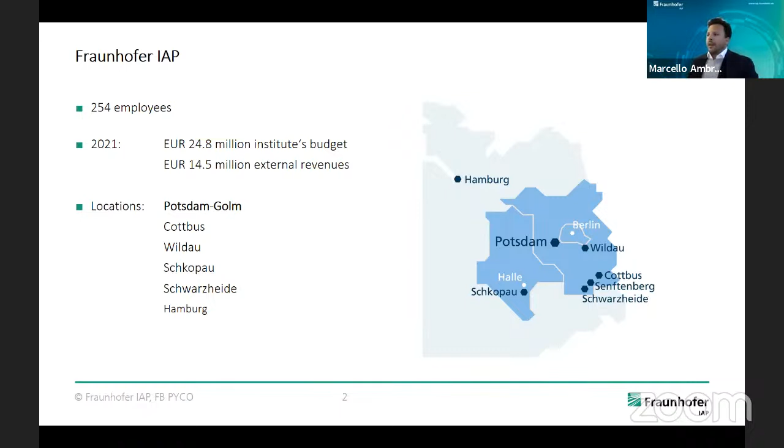So first of all, a few data about the Fraunhofer IAP. We are around 250 employees. We are located in the metropole region of Germany's capital, Berlin and Brandenburg. Our headquarters is at Potsdam. As PYCO, we are working on two sites, especially Cottbus and Wildau. I'm actually located in Wildau, which is not far from Berlin.

Here we can see our brand new buildings that we got last year, and we're pretty proud of it. So everyone is invited to visit us. As we're near the Polish border, we're also working a lot with Polish partners. There are also a lot of lightweight technologies located in this border region, so there's a lot of cooperation.

How are we set up and organized? The Fraunhofer PYCO is directed by Professor Seidlitz, and we divided our team into main divisions, departments. On one hand side, you find the tailored materials. On the other side, design and process technologies.

First of all, for the tailored materials, we have polymer development, covering high performance polymers, recycling and repair technology, microelectronics, and also alternative hardening and curing methods. Then we have Dr. Sebastian Steffen, who is responsible for our semi-finished components such as fabrics, bio-based materials, and modification of materials for fire retardancy - this is one of our main areas of expertise in this field.

On the other hand side, design and process technologies - we have my group, design and simulation, when it comes to the holistic design and conception of structural components with composites, but not only the parts, also the manufacturing processes like automated fiber placement and additive manufacturing. One of these processes I will explain today in this webinar.

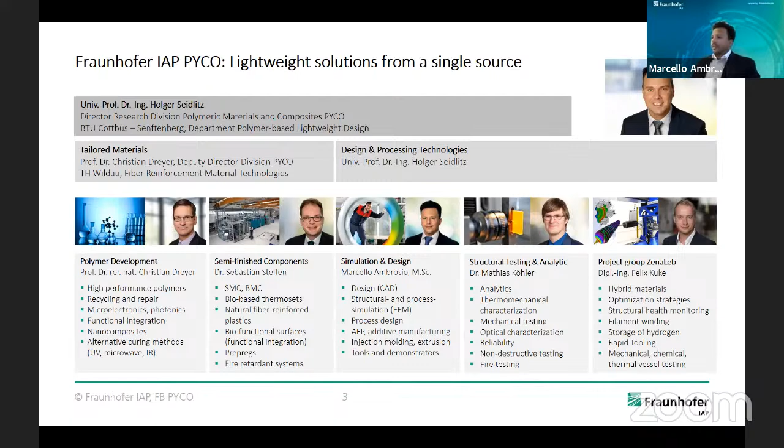Lightweight technology as a key for energy transition. As you know, we have big issues in our world: climate change, greenhouse effects, global warming. The requirement is to reduce CO2 emission, energy savings, and mass efficiency.

In this context, when we look at the formula for mechanical energy, we have mass, gravity, and velocity. Gravity we cannot change, it's basically a fixed value. Velocity we want to get slower. So the only thing we can do is reduce the mass, or work on the mass.

That's why the approach is to customize materials, design, and processes to achieve the goals and solve these problems. Lightweight is a cross-sectional discipline of lightweight design, and we make use of digitalization and AI, simulation of complex systems, to develop lightweight composites, digitalized product development, digital twins during development, with the help of decarbonization, national hydrogen strategies, as well as biologization of technology and circular economies.

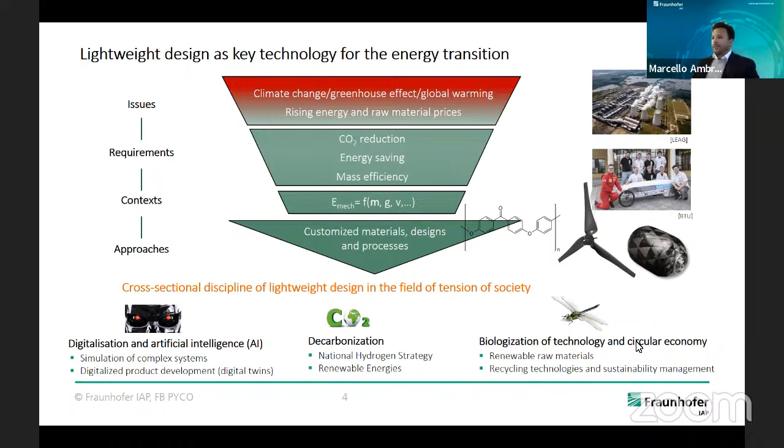We can see here different exports in the world, mainly when it comes to transportation and machinery. When we talk about the Western world, especially Germany or the US, we have a high amount of transportation and machinery. Lightweight technologies are very important to contribute to the climate change goals.

When we decrease the weight of components or technology by up to 10%, we are already able to save 3,000 million tons per year of carbon dioxide. Just to give you a brief impression of how important lightweight technologies are.

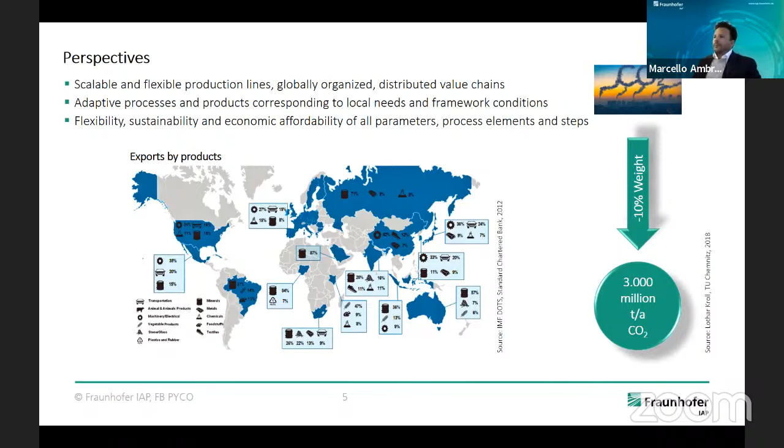So in this specific case, polymer-based composites - what are the advantages and challenges? We have excellent specific mechanical properties. We are a little bit stronger than steel, for example, but almost 4 times lighter. We have adjustable properties regarding thermal, acoustic, and mechanical behavior, a high degree of design and layout freedom, which also gives us the possibility to increase the degree of automation.

I want to explain why the orientation of fibers, let's say glass fiber or carbon fiber, is important. When we apply force in the fiber direction, we get almost 100% of the fiber performance. What is shown in this diagram on the right-hand corner is a strongly anisotropic behavior of these composite materials.

As we change the orientation of the material by only a few degrees, say 5 degrees, we already drop the performance from 140 gigapascal to 120. When we deflect about 10 degrees, we only reach half of the performance. That's why accurate positioning and orientation of the fibers while designing these composite materials is very crucial for performance.

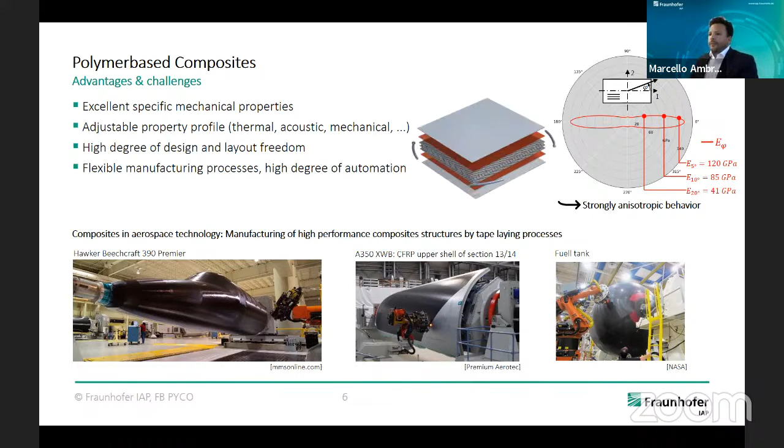For the future, we see the amount of composite material increasing drastically in aircraft manufacturing. We get 30% mass savings through the use of carbon fiber reinforced plastics. From the 70s to nowadays, with the modern A350 model, we have around 50% more carbon fiber or composite material inside the aircrafts.

To come to the hydrogen storage application, I would like to explain our developments regarding hydrogen storage, as an example of our recent developments for a decentralized Power-to-X pilot plant using solar and wind energy.

In this case, you can see a very simple and basic scheme of a Power-to-X plant. On one hand side we have a small wind turbine, on the other hand side we have hydrogen storage, and in between we have a control system, electrolyzer, and a fuel cell. I don't want to go deep into the other components - I would like to focus more on the wind turbine and the hydrogen storage for this session.

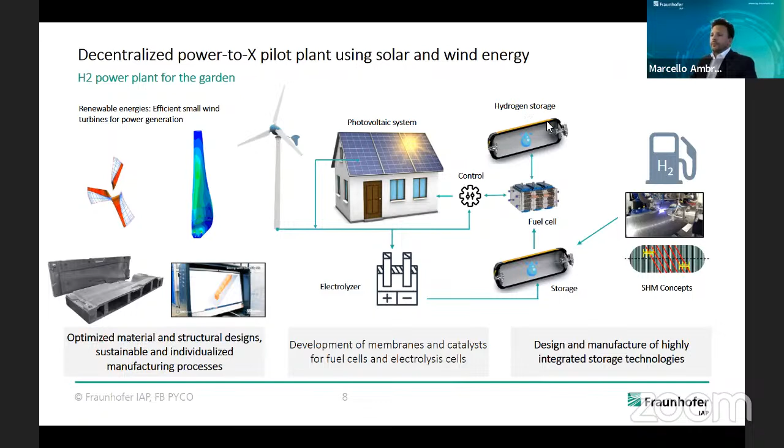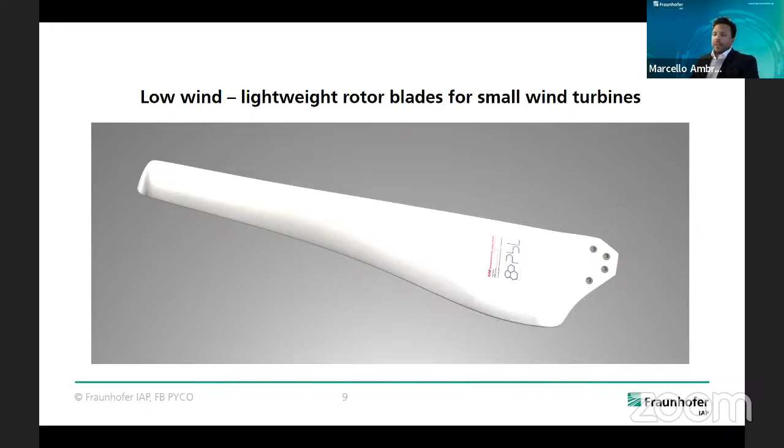So first of all, I would like to start with the low wind, lightweight rotor blade for small wind turbines. We developed that in cooperation with the University of Cottbus and a company, EAB Gebäudetechnik, here in Brandenburg. And what it is all about.

First of all, what is the potential for small wind turbines? I suppose every one of you knows the bigger ones, but actually there's also high potential for smaller ones. The actual problem is that recently designed small wind turbines are mostly made for shore regions or higher wind speeds. As you can see here on the maps for France, Germany, and Tunisia, we have high winds especially in the coast regions or mountain regions, but everything in between, we can see very low winds.

What we also have is that this low power revenue of wind speeds from 3 to 5 meters per second is not economical for someone who wants to install these kinds of small wind turbines. We also have high costs due to the manual manufacturing processes. Basically, these rotor blades are made of hand laminates, and there's low social acceptance, especially in urbanized zones and big cities. They don't want to have these small wind turbines everywhere.

So what is the actual demand? We need small wind turbines for low wind regions with decreased operating wind speeds, to place them in our middle region where we have low winds. We have to reduce the cost of manufacturing and the weight, and we have a high demand regarding the actual problems in the world for decentralized power supply due to increasing energy prices.

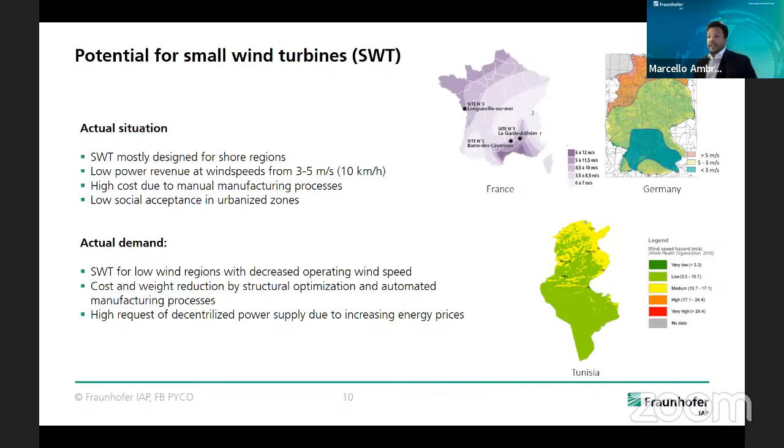So how did we solve this problem? We developed a glass carbon fiber shell design. We have a rotor blade system which is 1.5 meters long, so the diameter will be 3 meters. The tower of the wind turbine is around about 10 meters high.

And you have to know that when we come up to higher winds at a certain point, the machine has to stop, and therefore we will have some adjustment mechanism in the blades, which are very high in maintenance. With the optimization of different designs and profiles, we reached a weight reduction of 35%.

Our blade decreased weight from 3.7 kilograms to 2.4 kilograms, and at the same time we increased the effective surface about 45%. Due to our optimizations, we were also able to reduce the noise. And what is very special at this point, we manufactured these composite blades with a printed tool, which I will explain now.

So what is the performance? We have 2.5 kilowatts at 8 to 10 meters per second, and a minimum wind speed of 3 meters per second. As you can see, we already match these low wind regions for the installation of this rotor blade.

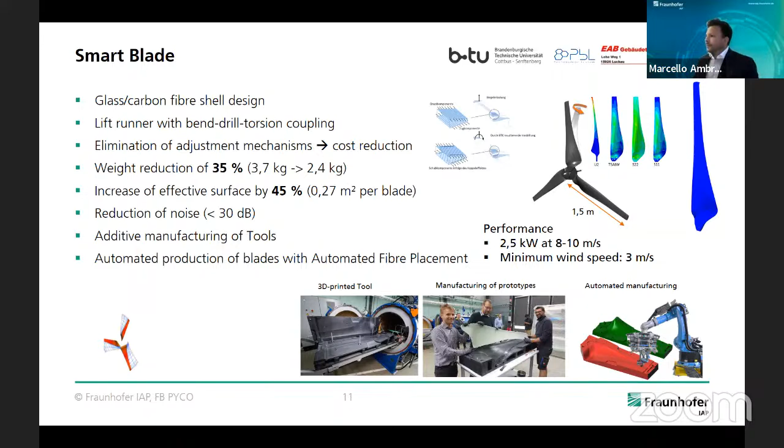So we were very successful in this case. I don't know if you can see the videos playing, but we can see that due to the mass reduction we have a higher and quicker adaptation, acceleration to the wind speed, and less noise emission based on numerical profile optimization.

We have a field test here near Berlin since June 2021. Duration of assembly is around 3 hours, and we measured so far a maximum rotation per minute of around about 500 rotations. We are very proud that from next week we will have some wind tunnel tests at the Technical University of Berlin. It's called GroWiKa, it's a big wind channel, and we are looking forward to the results.

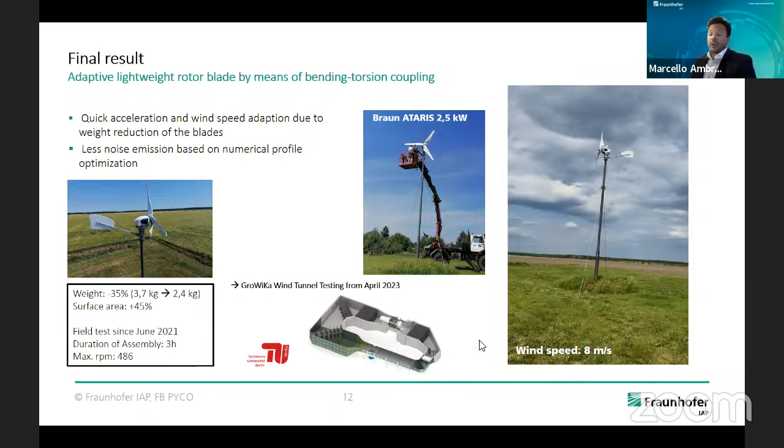Here's just a short explanation of how this printing system works. We have a large-scale additive manufacturing center. We can extrusion print up to 1.3 by 2.3 by 1 meter, so it's quite a high volume, with a maximum print rate of 40 kilos per hour.

And we printed this tool, which you can see here in the middle, for the rotor blade in 7 hours. What is the big advantage of this technology compared to recent milling technologies or materials like polyurethane as a block material? We have cost cutting of up to almost 80% using extruded shell and hollow geometries.

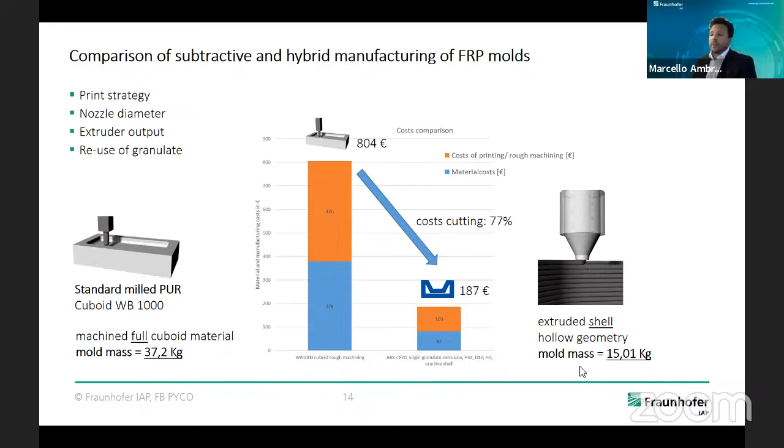This also allows us to decrease the weight and energy while moving or producing the molds and producing the rotor blades, so that compared to a full polymer material of around about 40 kilos, we decrease the mold mass to up to 15 kilograms.

When it comes to pressure vessels, we have different process technologies for the production of hydrogen tanks: on one hand, automated fiber placement, which we saw earlier for aircraft components, and on the other hand, filament winding, which is also used to produce these types of pressure vessels. Let me give a short introduction to how pressure vessels are built up.

Basically, there are different types, type 1 to type 5. Type 1 is the most common or easiest pressure vessel, a monolithic metal tank. Type 2 is a perimeter reinforced metal tank. Type 3 is a fully reinforced metal tank, so we not only have fibers on the outer side, but also on the caps, on the domes.

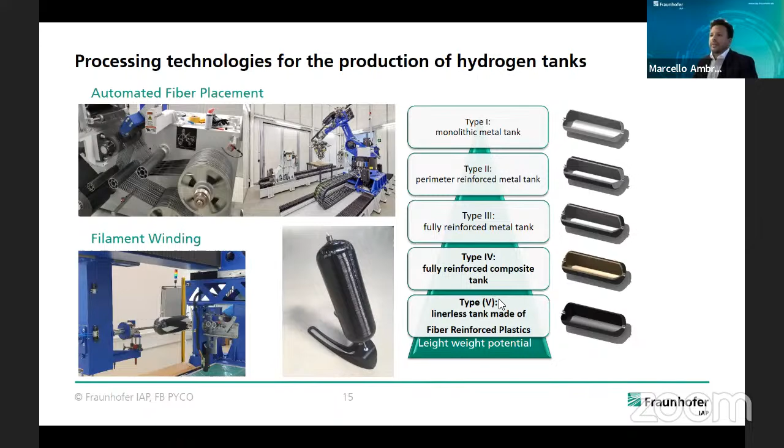The type 4 pressure vessel is pretty much the same as type 3. The only difference is that we have a polymer liner inside instead of a metal liner. Type 5 is a linerless tank made fully of fiber reinforced plastics. As you can see, type 5 has high lightweight potential, and this is what I'm going to explain based on an example for hydrogen buses.

So why fiber reinforced plastics or composites? In this case, we have a hydrogen bus in the region of Cologne with a tank that has an operating pressure of 700 bars, a length of 3 meters, and a diameter of around 0.3 meters.

When we design it like type 1, it would have a mass of 1.7 tons. As we add some carbon fiber for type 2, as shown before, we already decrease to 611 kilograms based on the fibers we use. When we do the same pressure vessel as type 5, we reach almost 100 kilograms of weight per vessel.

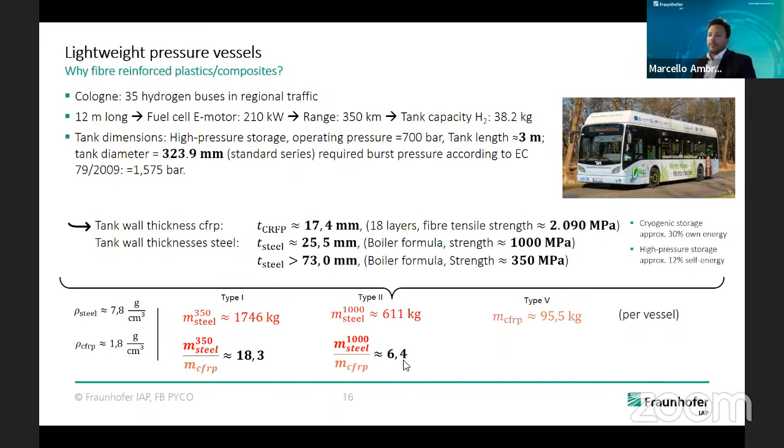So as you can see, the fiber reinforced pressure vessel is up to 20 times lighter than the full metal mass, and 6.4 times lighter than the type 2.

Here's another example of how we updated a type 1 monolithic metal vessel to a type 2 circumferential reinforced metal vessel. The operating pressure of the type 1 pressure vessel is around 11 bar, and just by adding a 0.25 millimeter ply thickness of fiber reinforced plastics around the pressure vessel, we triple the operating pressure.

The ply thickness of 0.25 millimeters on 1 meter is maybe not even 1 kilogram of material added onto the pressure vessel, but we gain triple the operating pressure, and this is quite impressive. This is also, as I said in the beginning, so important to keep the right orientation of the fibers.

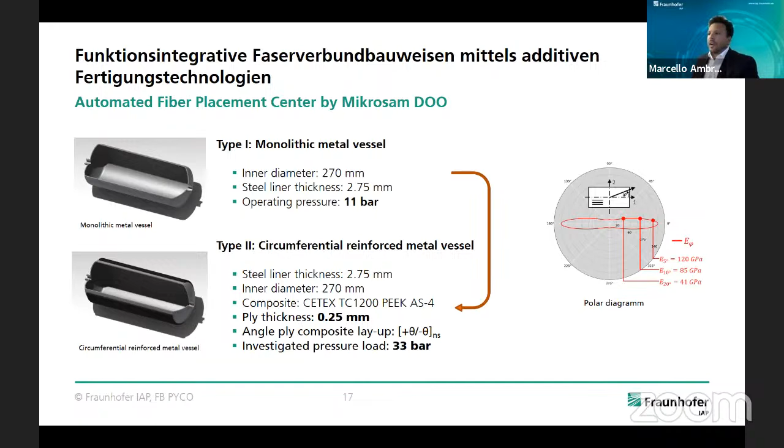During our developments for pressure vessels, we always use a combined process and structure simulation of the winding or laying process. On one hand, we have process simulation with different simulation softwares like CADwind, ComposiCAD, Winding Expert. On the other hand, we have structural simulation, analytical or numerical, with different netting theories, the classic laminate theory, and also Abaqus with composite modeler, which are specific modelers for composite design.

In the end, we have an end-to-end process and structural optimization of the entire part. From the process simulation we get the winding length, material consumption, critical wind angles, gaps, failures, fiber orientation at each point, process duration, and also the G-code for the machine.

On the structural simulation side, we investigate critical stress areas and maximum deflections in certain regions of the pressure vessels. We also optimize the inhomogeneous stress distribution in the boss regions, and perform failure analysis of the pressure vessel.

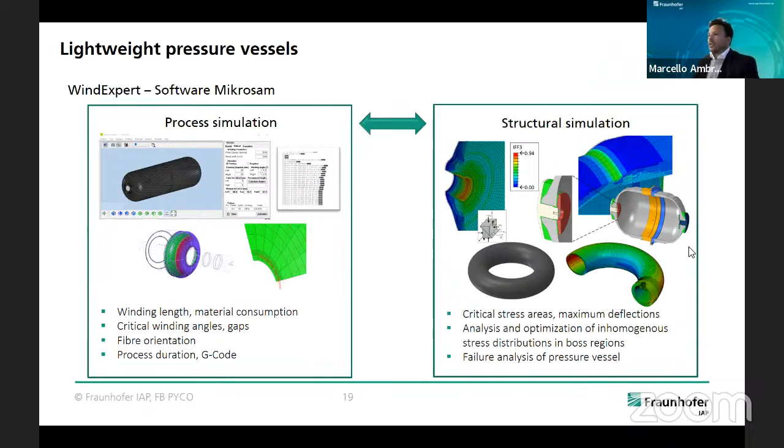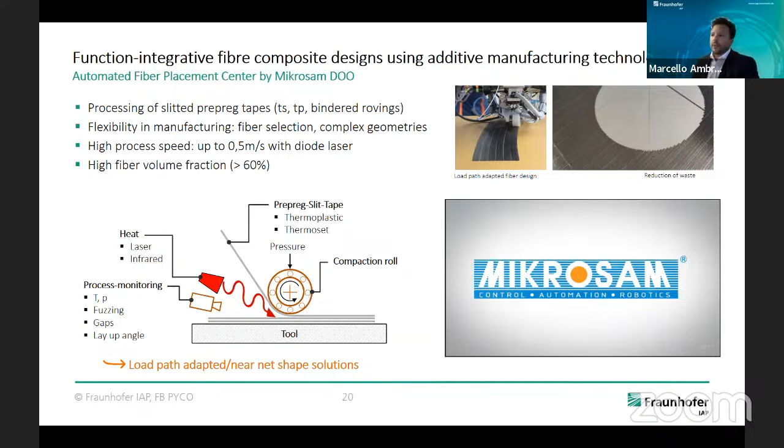So this is how it works in practice. I don't know if you can see the videos running. Here's an example of the evolution from the type 1 to type 2 vessel, which we developed and manufactured here at our site in Wildau.

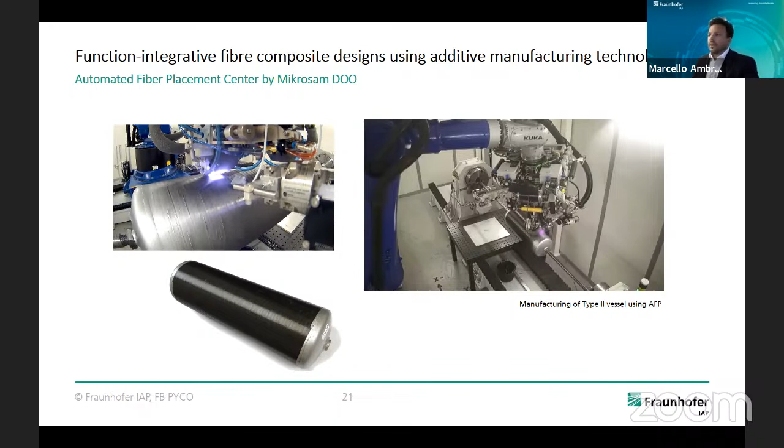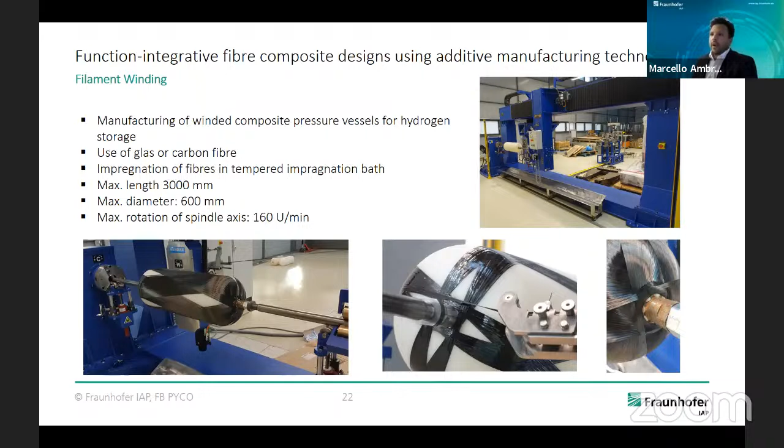Another process is filament winding, where we wind composite pressure vessels with rovings. These are more flexible carbon fiber rovings compared to tapes. We have an impregnation bath in the center of the machine, and impregnated rovings are placed perfectly on the polymer liner. We can manufacture a maximum length of 3 meters and a maximum diameter of 600 millimeters for this pressure vessel, which is already quite good dimensions for R&D.

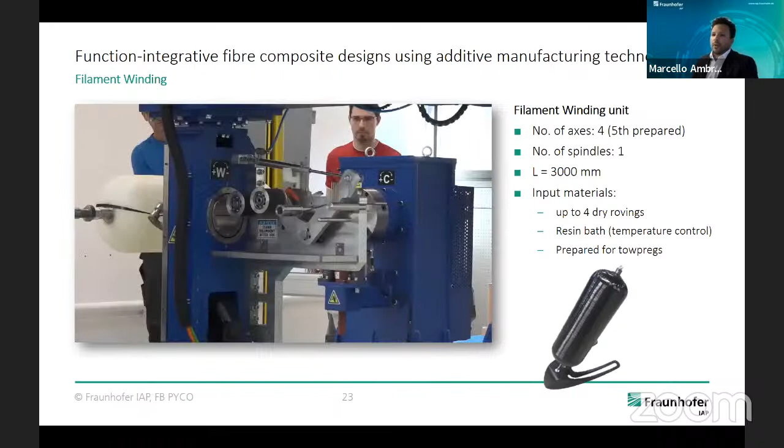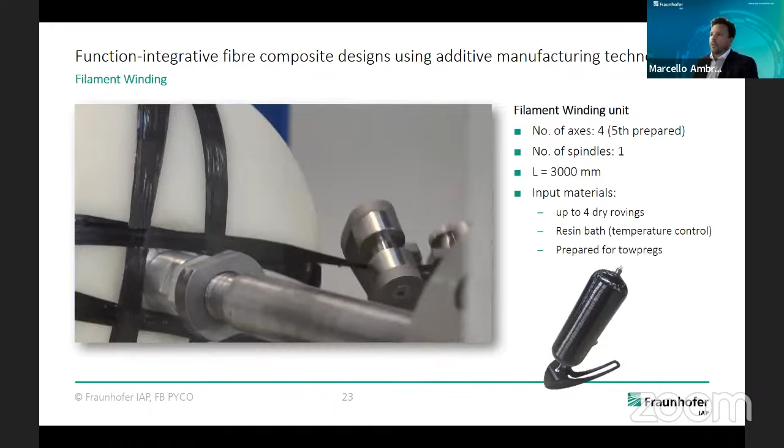Here's a demonstration of how this winding process works. We start at one point, and as you can see, the roving comes from the impregnation bath through different rolls and gets calibrated onto the liner with the winding eye, a specific machine part that transports the roving. We have the possibility to input different types of materials, up to 4 dry rovings. We have a temperature controlled resin bath, and we also prepared this machine for towpreg, a new technology of tapes.

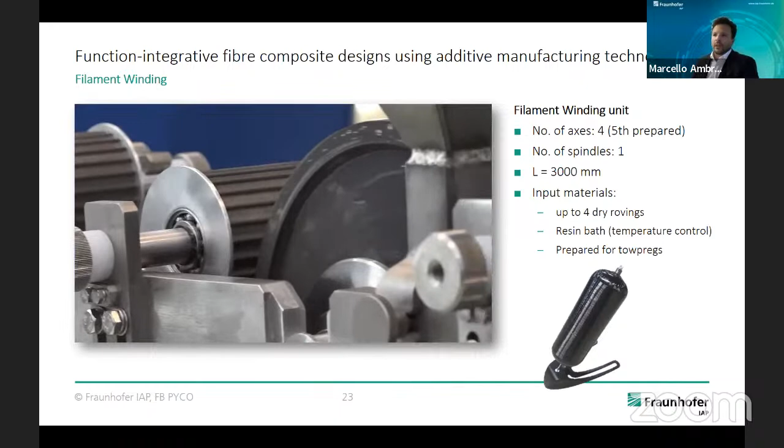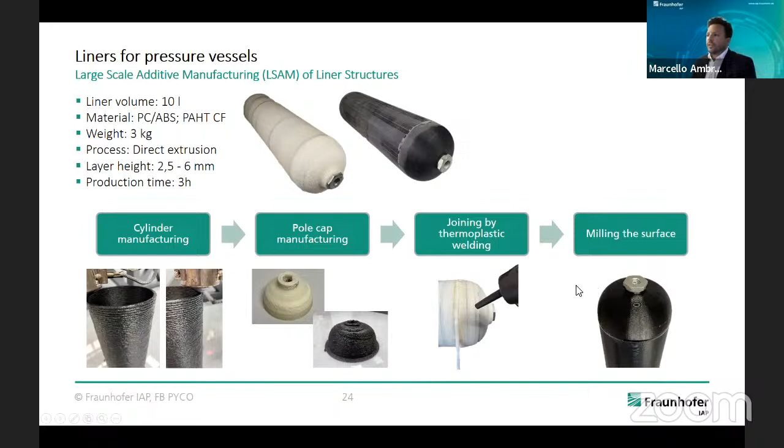The liner is a very important component for manufacturing, and it's not easy to get these liners — you'll always find different dimensions and so on. So we had the idea to print our own liner, which was very successful. First we did the cylinder manufacturing, then the pole cap manufacturing, and by thermoplastic welding we joined these components. After that, we finished the surface by milling and got very good results.

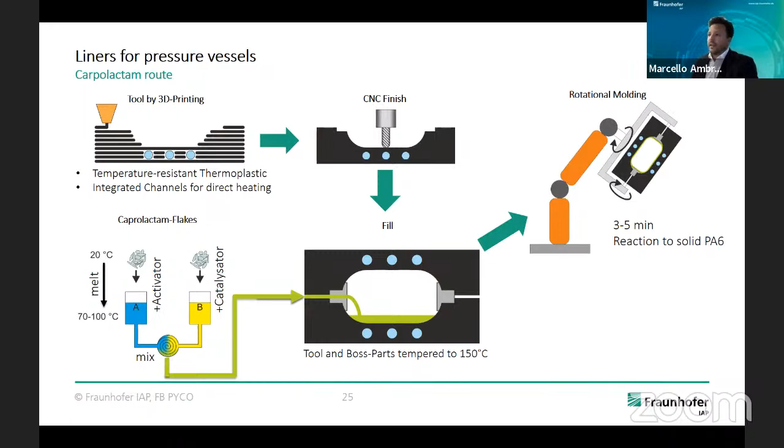On the other hand, we have another route: the caprolactam route. Caprolactam is a precursor for polyamide 6, and by activating it with activators and catalysts, we're able to mold our own PA6 liner by rotomolding, with very sustainable, low energy molds and low temperatures compared to melt extrusion or rotomolding of melted PA6. It's much more energy efficient.

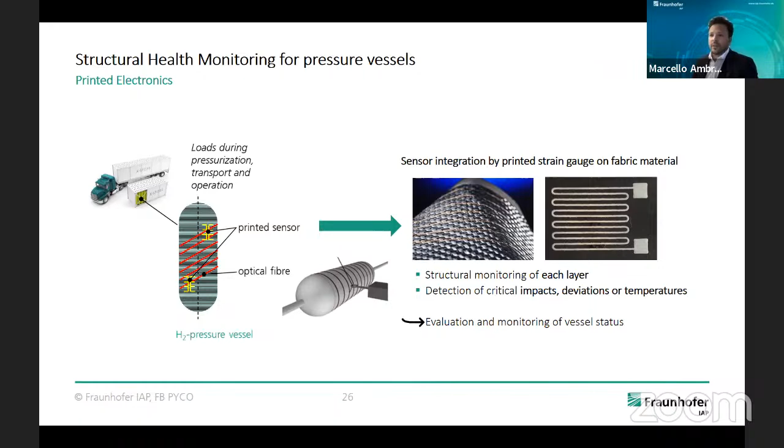Beside the production of pressure vessels, we are also dealing with the integration of structural health monitoring systems. We use printed sensors and optical fiber in combination as a dual sensor concept to monitor and evaluate critical deviations or impacts to our pressure vessels. This is a very important issue when you want to use these pressure vessels in future, especially in private environments.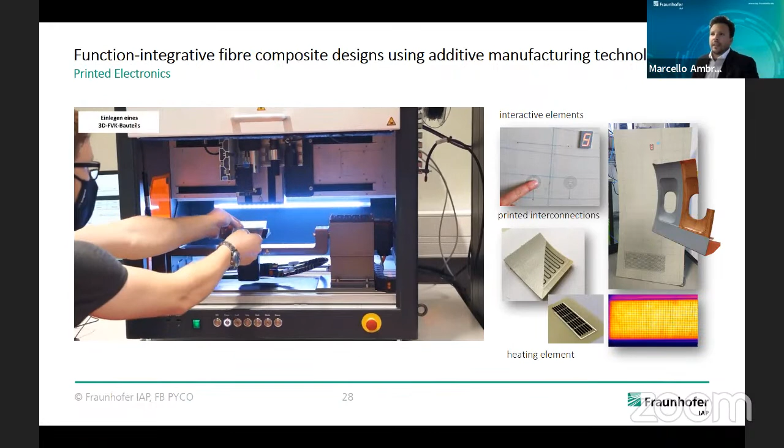We have here a specific rapid prototyping machine which combines different additive manufacturing technologies. We have a 5-axis system, so we are flexible and able to print 3-dimensional electrical circuits. In this case, we have different projects for aerospace where we integrated heating elements, for example, for heating of the cabin or even de-icing of the wings.

You can see that we apply different types of inks — in this case, it's silver ink. In the next step, we'll see the application of carbon ink, which gives us the functionality of heating. We can manufacture this in just a few minutes after hardening and curing of the inks. This system is totally ready for application.

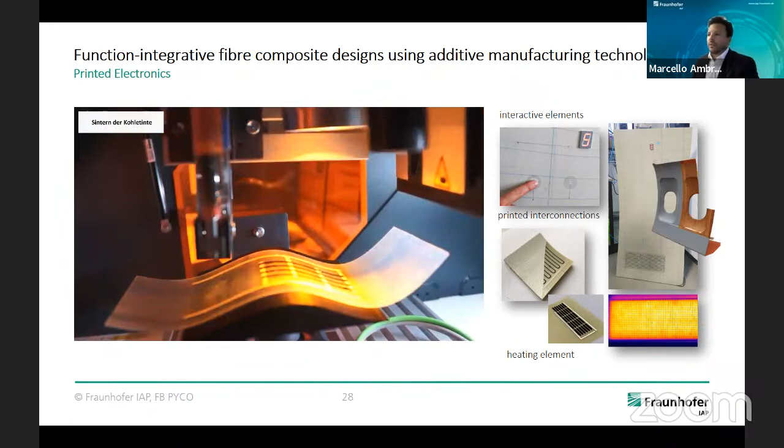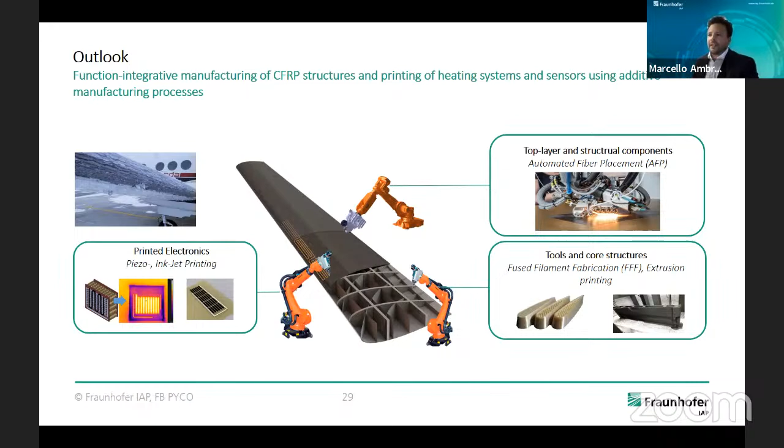Our outlook or vision for the future is to combine all these presented technologies — on one hand, printing of core materials and molds, then applying top layers and structural components by automated fiber placement, and in between integrating functionalities through printed electronics, as you can see in this picture. This is still a vision of ours; we hope to achieve it one day for a specific demonstrator.

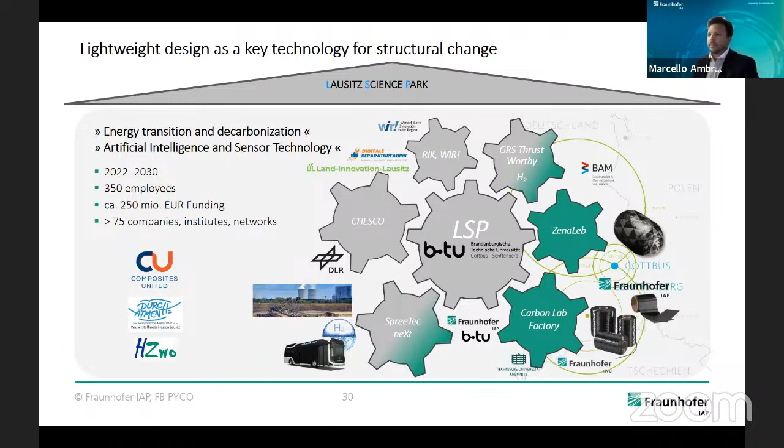Just to sum up, the Fraunhofer Project Group CENALab, Center for Sustainable Lightweight Technologies, combines all the technology which are presented here. We concentrate the activities regarding hydrogen in this project group, which goes to 2026 with a financing of 4.5 million euros. Thank you very much.

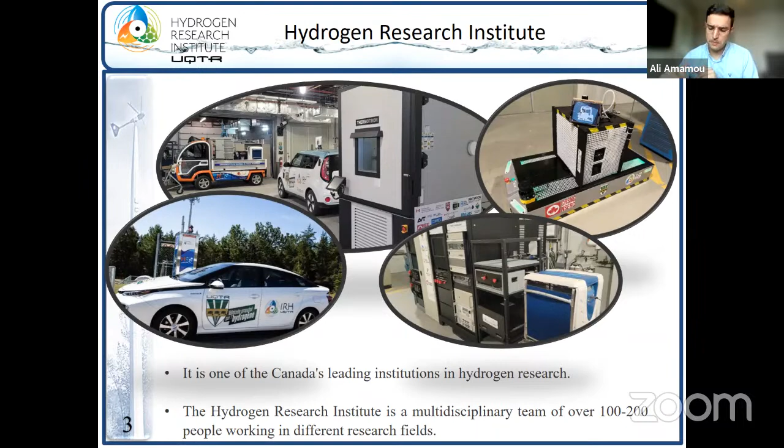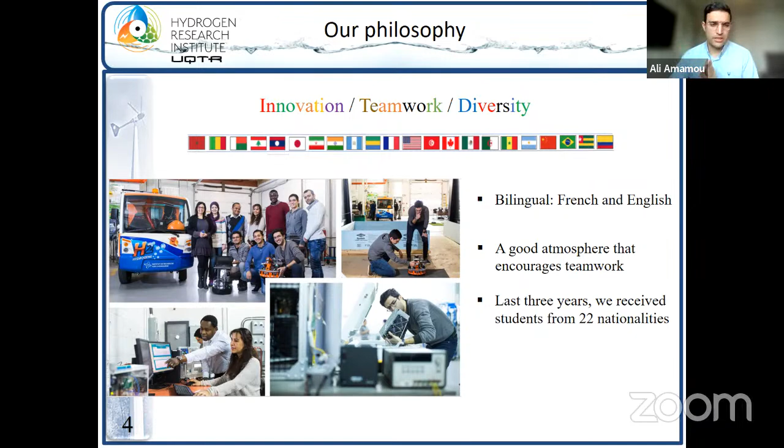It's multidisciplinary. We have a multidisciplinary team of over 100 to 200 people working in different research fields, and we have an international team from 22 nationalities. We are always hiring PhD students, master students, and postdocs, so if there is any interest in what we are doing, and we will have more details about that in the following, you can contact me. You will find my contact on the first slide or second slide.

Now we will move to our research activities in the Hydrogen Research Institute. We have around 3 big research activities. The first one is the smart networks. It's around buildings, energy, local demand management, transactional management, artificial intelligence, and embedded systems.

The second research activity is around hydrogen technology and clean energy. It's more about chemical and material topics linked to hydrogen technology. So we work around the production and use of hydrogen, electrolyzers, fuel cells, materials like catalysts, membranes, electrodes, bipolar plates, and hydrogen generators. We also work on photovoltaic solar energy, wind power, and smart microgrids.

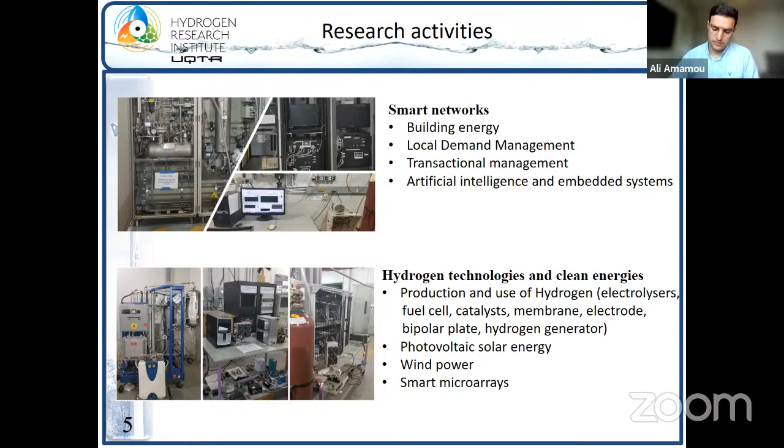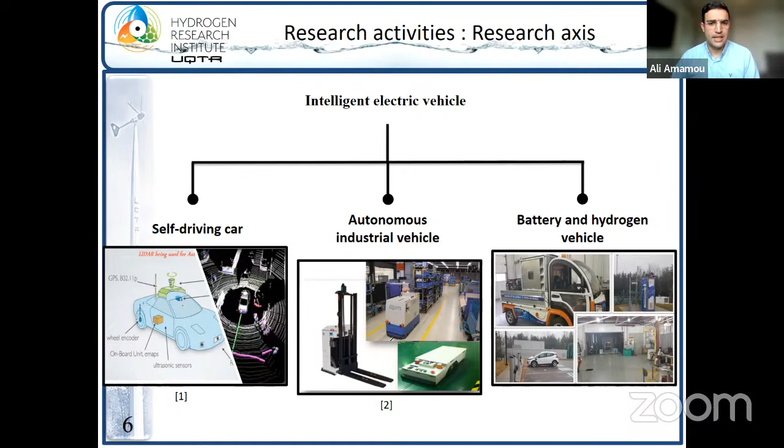The third research axis is intelligent electric vehicles, and it's my team. I'm leading this team with Professor Sousso Kelouwani, and we have 3 axes in our team. The first one is the self-driving car, the second one is the autonomous industrial vehicle, and the last one is the battery and hydrogen vehicle. In the following, I will go deeply into every axis.

For the first one, self-driving cars, the objective is to develop driving assistance systems by considering the vehicle's energy efficiency. Here we develop adaptive braking systems, adaptive cruise control systems, forward collision warning, and alert systems for dangerous situations.

Here we develop and integrate different hardware like intelligent cameras, infrared cameras, lidar, and radars. We work a lot to fuse these different sensors and to adapt this kind of technology to the weather of Canada, because Canadian winter is a little bit complicated and difficult for this kind of technology. One of the main focus of this axis is how to use intelligence to improve the energy efficiency of hydrogen vehicles.

I'll give an example. With intelligence, we are able to detect stop possibilities, for example by detecting pedestrians in winter conditions or any vehicles or dynamic obstacles. Based on the driver behavior, we optimize the regenerative braking energy, and with that we are able to increase the energy efficiency of this kind of vehicle during braking.

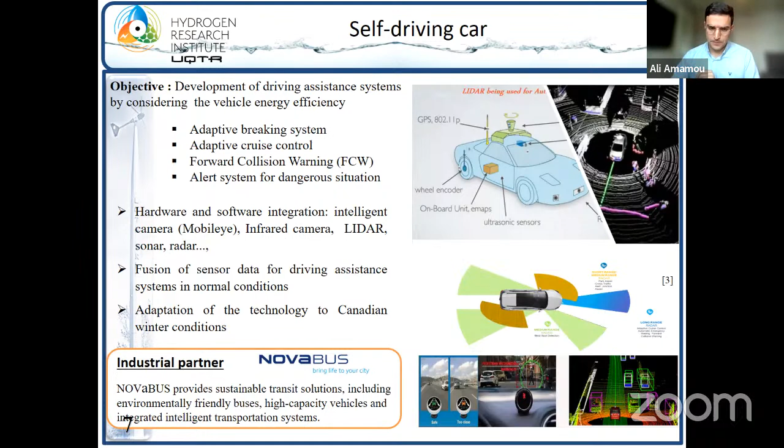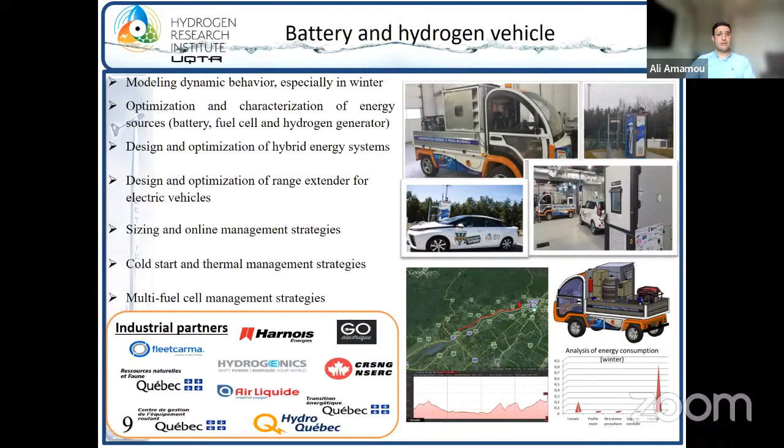The last axis is battery and hydrogen vehicles. Here we work on modeling dynamic behavior, especially in winter, the optimization and characterization of energy sources like the battery, the fuel cell, and the hydrogen generator, the design and optimization of hybrid energy systems, and design and optimization of range extenders for electric vehicles. We also have expertise around sizing and online management strategies for different kinds of vehicles, cold start and thermal management strategies, and multi-fuel cell management strategies.

I got my PhD in 2018 around cold start and the energy management strategy of hybrid and hydrogen electric vehicles. At that time, we didn't have any industrial partner interested in hydrogen or in integrating hydrogen into their vehicles.

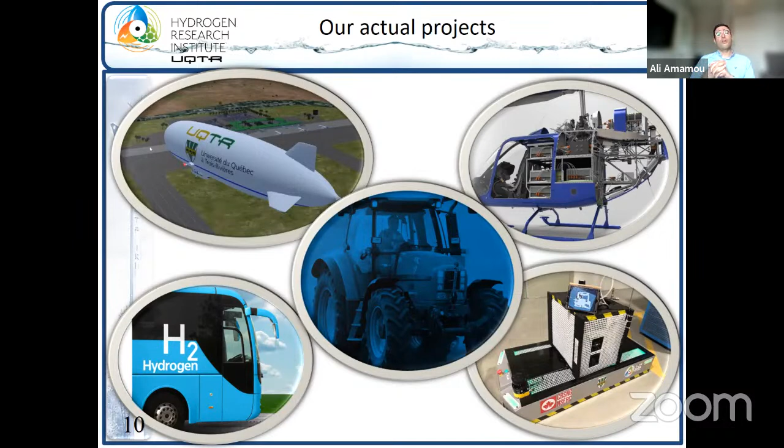In the last 3 years, we've seen a big trend of interest in hydrogen and integrating hydrogen in different kinds of vehicles. We see a lot of big players and important industrials in their fields wanting to integrate hydrogen into their vehicles. Now we have different industrial projects asking for the same thing: engineering, sizing, energy management strategy, and help to integrate hydrogen technology in their vehicles. We have one project about integrating hydrogen for airships, helicopters, agriculture like tractors, buses, and of course also for industrial mobile robots.

I'll show a video that gives more details about our different axes, with some pictures and videos.

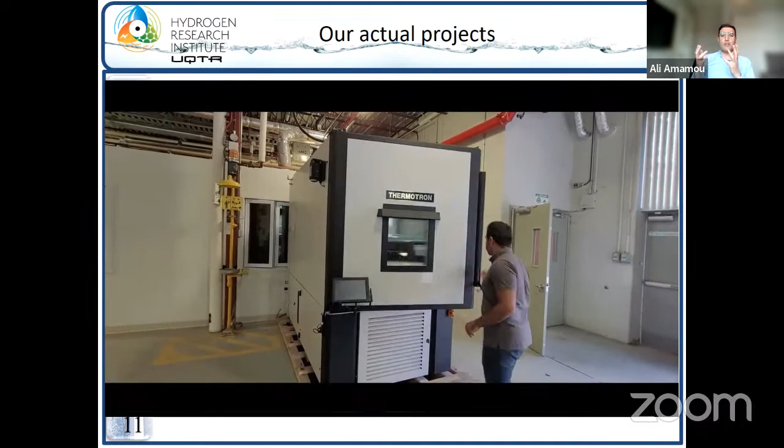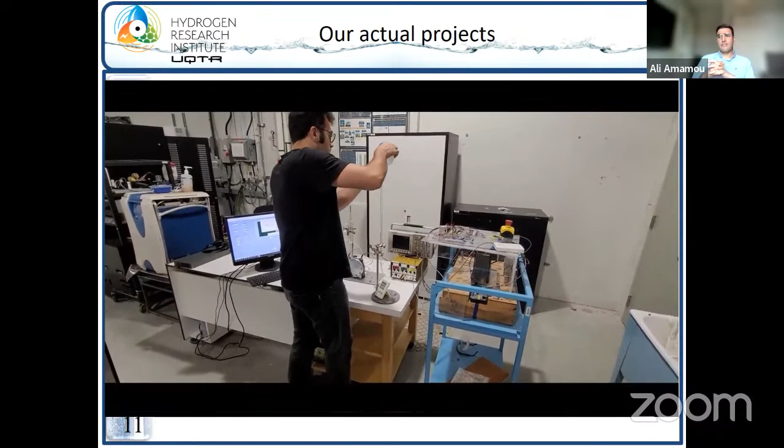Here it's around hydrogen. We have the Toyota Mirai, a hydrogen vehicle. We have around 50 cars now in Quebec under one project, to check and evaluate the effect of winter on that kind of vehicle. You also have the first filling and production stations in Quebec, and we are evaluating the effect of weather and low temperature on that technology. Here we have a climatic room where we can go down to -50, to evaluate the effect of low temperature and humidity on that kind of technology. We also work on multi-stack management to improve the energy efficiency of the whole system.

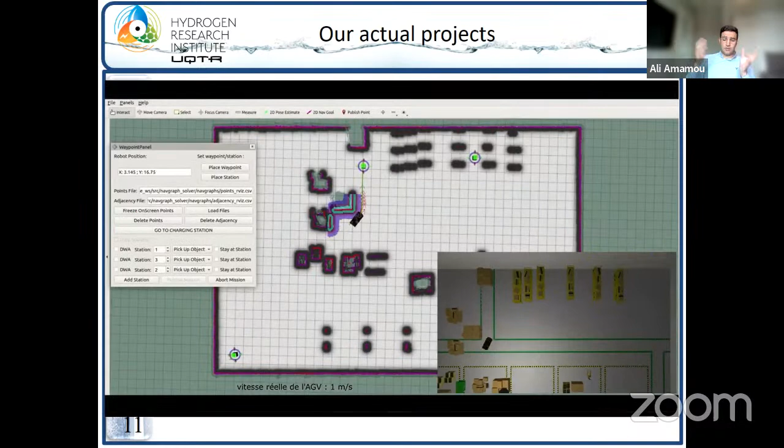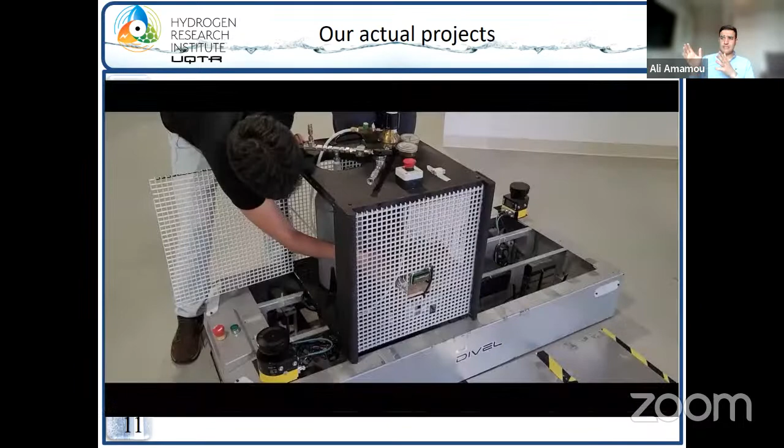Here it's Professor Sousso Kelouwani, the leader of our lab, and this is around industrial mobile robots. As I explained in the previous slides, we developed all the autonomous navigation stacks for this kind of vehicle in simulation, and we integrate them in the beginning in our experiment vehicle in the lab. After we validate everything in the lab, we go implement and integrate on the real application with this partner.

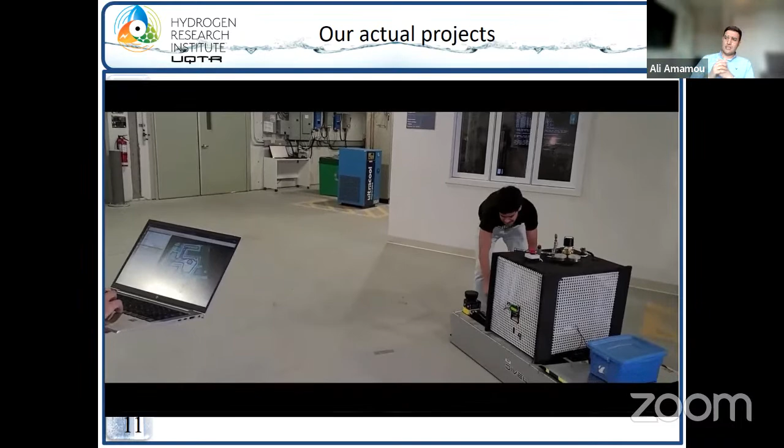Here it's the same mobile robots, but working with hydrogen. The black and white box is the hydrogen unit, and it extends the autonomy of the vehicles. In the beginning it was battery-based vehicles with around 8 hours of navigation, and we extended that to 24 hours by integrating hydrogen.

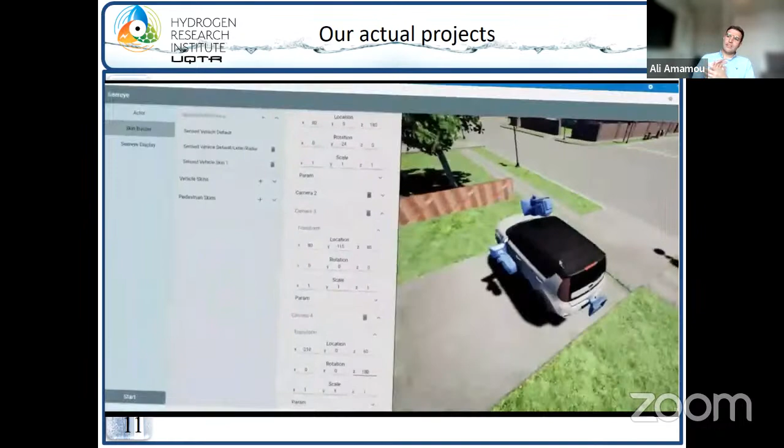Here is for the self-driving car. So we have our own car, but we transform it to an autonomous car. The project is still in progress.

We integrate all the sensors and we validate everything, estimation, and we start integrating everything on the real vehicle. Our main concern here is how to use intelligence to improve the energy efficiency of hydrogen vehicles. So we work on battery-based vehicles and on hydrogen vehicles, and we have very good projects around this topic too.

Okay, now we'll move to the second part of the presentation. We'll talk more about hydrogen in mobile industrial robots. I will start by putting you in the context.

Industry 4.0, also known as the fourth industrial revolution, refers to the integration of advanced technologies such as artificial intelligence, Internet of Things, robotics, and cloud computing into industrial processes. It involves digitalization and automation of manufacturing and other industrial processes to improve efficiency, productivity, and flexibility.

Industrial mobile robots are an important component of Industry 4.0. Mobile robots are autonomous machines capable of moving around the factory floor or warehouse to perform tasks such as material handling, assembly, and inspection.

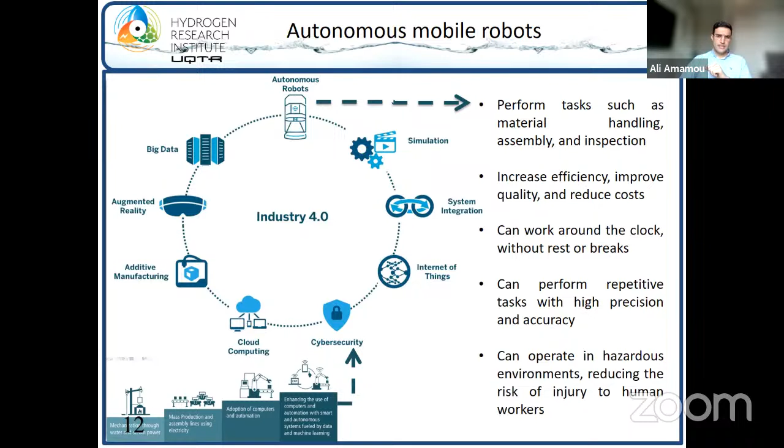There are three kinds of autonomous mobile robots in industry. The first one is autonomous inventory robots. The second is goods-to-person picking robots, and the third is self-driving forklifts.

Some of the main topics of industrial mobile robots include navigation: mobile robots must be able to navigate around the factory floor or warehouse, avoiding obstacles and navigating through narrow spaces. And localization: robots must be able to determine their location in the factory or warehouse to perform tasks accurately.

Manipulation: mobile robots must be able to manipulate objects such as parts and tools using grippers and other mechanisms. Human-robot interaction: as robots become more integrated into industrial processes, it's important to consider how they will interact with human workers. The propulsion system generates power and delivers it to the road surface, including the power source like the fuel cell and the battery, and of course the engine.

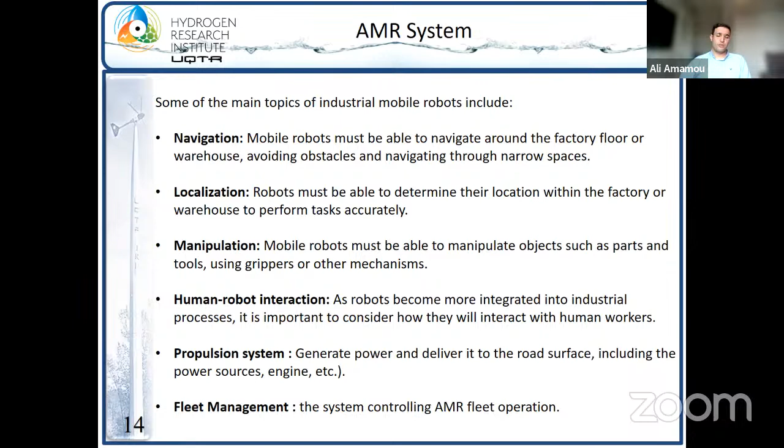The fleet management system controls the autonomous mobile robot fleet operation. Autonomous mobile robots can be powered with different sources: engine-powered AMR, fuel cell-powered autonomous mobile robots, solar-powered autonomous mobile robots, wireless charging, or battery and supercapacitor-powered autonomous mobile robots.

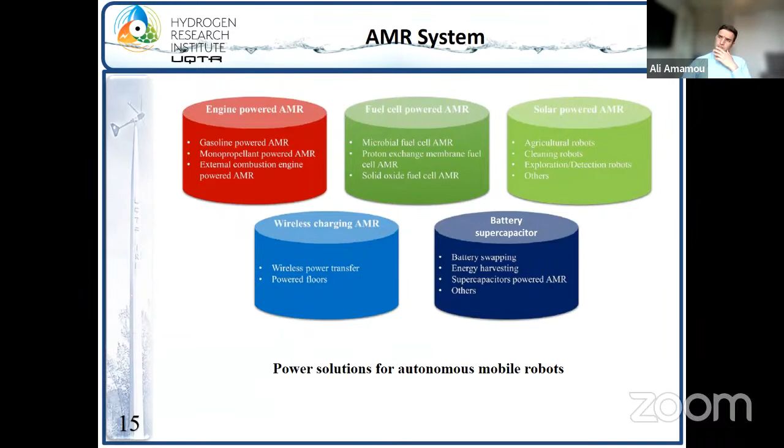The most interesting among all those sources are the fuel cell and the battery. The choice between battery and hydrogen depends on the specific application and requirements of the robots or forklifts. For goods-to-person picking robots, batteries are typically a better choice due to their energy efficiency and small size. For self-driving forklifts, hydrogen is often a better choice due to longer operating time and the ability to handle larger loads that require high power and large energy requirements.

Hydrogen fuel cell forklifts are becoming increasingly popular in industrial applications as alternatives to traditional batteries and gasoline-powered forklifts, making them a zero-emission alternative to traditional forklifts that emit pollution and greenhouse gas. One advantage of hydrogen fuel cell forklifts is their fast refueling time: while battery-powered forklifts can take 1 to 2 hours to recharge, hydrogen fuel cell forklifts can be refueled in just a few minutes, reducing downtime and increasing productivity.

Another advantage of hydrogen fuel cell forklifts is their long operating range. They can operate for up to 8 hours on one single tank of hydrogen, longer than the operating time of most battery-powered forklifts. Battery-powered autonomous mobile robots generally lose a quarter of their charge when the temperature drops from 25 degrees Celsius to -15, whereas hydrogen-powered forklifts retain their charge and maintain their performance despite low temperatures.

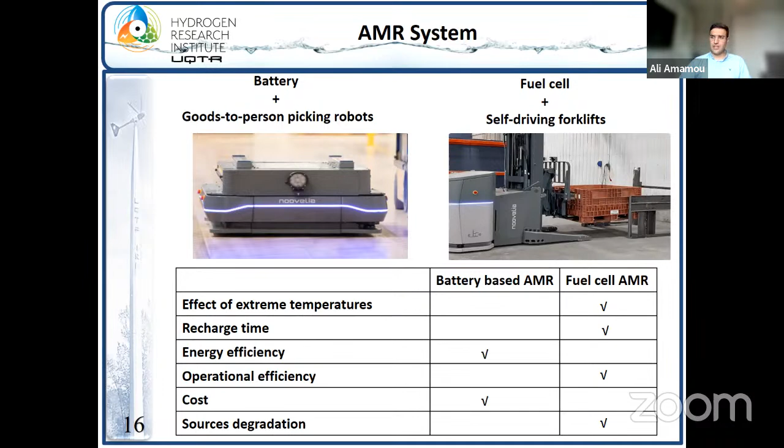Fuel cell is a very good option as a power source for forklifts. Fuel cells are able to generate electrical power with high efficiency, low operating noise, and no emissions.

Among the different kinds of fuel cells, the proton exchange membrane fuel cell is the best one adapted to this kind of technology, because the PEMFC has definite advantages in its favor for electric vehicles.

First, low temperature operation and hence fast startup are desired for an electrical or hybrid vehicle. Second, the power density is the highest among all available types of fuel cell. The higher the power density, the smaller the size of the fuel cell that needs to be installed for the desired power demand. Third, its solid electrolyte does not change, move, or vaporize from the cell. Finally, since the only liquid in the cell is water, the possibility of any corrosion is essentially limited.

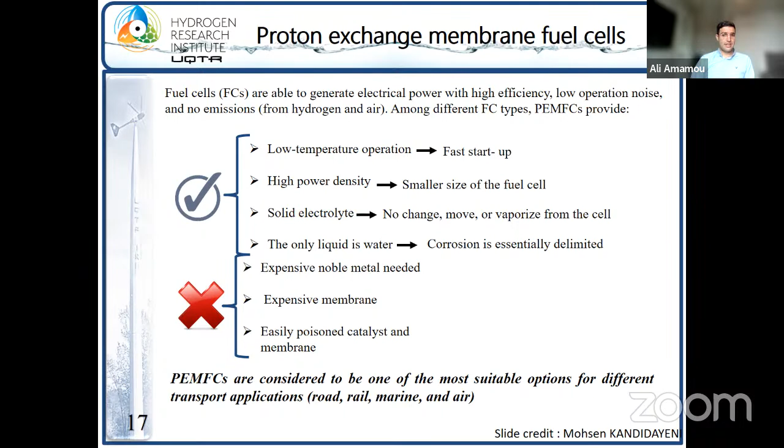However, it also has some disadvantages, such as expensive noble metal needed, expensive membrane, and easily poisoned catalyst and membrane.

So the fuel cell has a lot of advantages, but also presents some disadvantages, like cold start challenges in cold weather countries, the voltage change with load variation, and the incapability of absorbing any energy because it's a unidirectional power source.

Another main weakness of the fuel cell system is the slow dynamic, dominated by the temperature and the fuel cell delivery system, like the pumps, the compressor, the valves, and the hydrogen reformers.

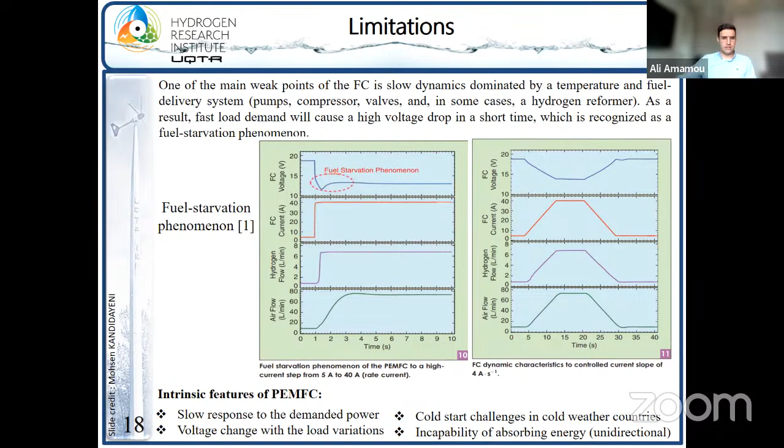So to fix this problem, hybridization is mandatory. It's very important to add another source with the fuel cell, like the battery and the supercapacitor, because the supercapacitor and battery present better power density compared to the fuel cell, and the fuel cell presents better energy density compared to other sources.

Combining both or all three of them together can satisfy the fast dynamic load, reduce degradation rate by absorbing peaks, increase the fuel cell economy without sacrificing performance, and improve the powertrain components' efficiency. It supports the power load during cold start, and it gives the opportunity for energy recovery, especially for regenerative braking energy.

Another aspect that is very important for high power application is possible: either to consider just one fuel cell with its auxiliary parts to satisfy the application requirements, or to use a multi-stack fuel cell system integrating two or more low power stacks including auxiliary parts. Considering multi-stack, it can match survivability and durability, give a higher degree of freedom and flexibility in architecture, and also overall operating cost decline and efficiency improvements.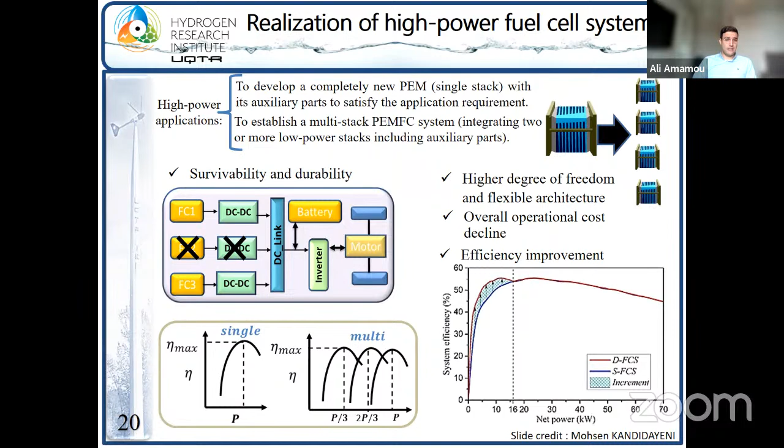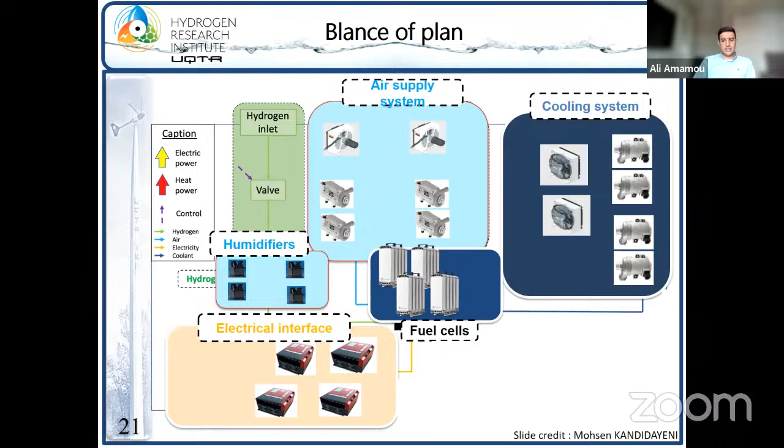A high power fuel cell system is not based on just one fuel cell. It's the fuel cell with the air supply system, the cooling system, the humidifier, the electrical interface, and the hydrogen supply. It's a very complex system, and sizing every component here with the fuel cell and the battery is a big challenge, but it needs very optimized algorithms and good choices for the different components to cover the energy requirements of the system with the best efficiency.

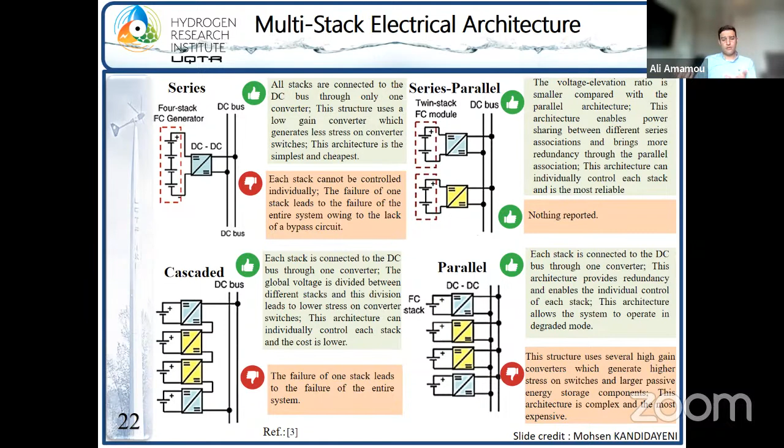Also, by considering hybridization and multi-stack, it's very important to choose the best architecture. There are different architectures, like series architecture, cascaded, parallel, or series-parallel. Every architecture presents some advantages and disadvantages, and the choice of architecture should be based on the requirements of the vehicle, the energy vehicle requirements.

Another aspect that is very important for autonomous mobile robotics in industrial context: the industrial context presents repetitive missions, dynamic obstacles, and small corridors. The performance of the fuel cell system is highly susceptible to these operation conditions because it will present frequent start and stop.

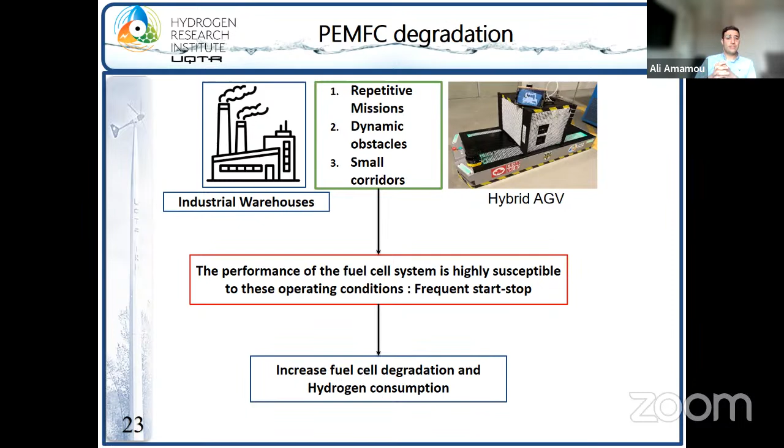So the question is how we can minimize the degradation and the hydrogen consumption from the system point of view by considering just the energy management strategy. So what I present now is the hybridization, the choice if it's one fuel cell or multi-fuel cell for high power applications, and also considering the degradation of the different sources by considering the operational context of industrial vehicles, so we have the best choice in terms of all these elements.

The sizing and energy management strategy need to be coupled together, and it presents a coupled problem. From a system level perspective, this coupled optimization problem can be classified into 4 categories: sequential, iterative, simultaneous, and bi-level.

The first one, sequential, is like the component sizing and power management strategy is optimized in a sequential manner. Usually, the plant or component size should be optimized first before controller optimization.

The second one, iterative, the component size and controller is optimized in an iterative manner. More specifically, given the initial component size and controller parameters, iterative optimization strategy tries to improve the initial choice by first improving the component choice without compromising control performance, and then optimizing the controller design without compromising system performance until the component size

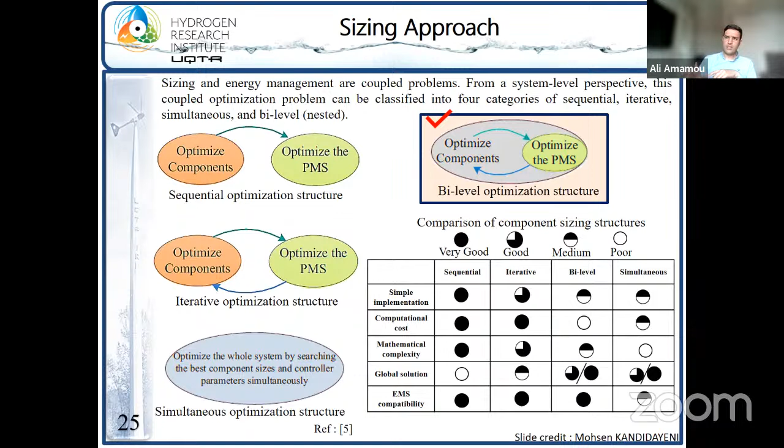Considering energy management strategy, there are 3 big categories: rule-based strategies, optimization-based strategies, and data-based strategies. For each one there are advantages and disadvantages, but the more interesting ones are the optimization-based strategies and data-based strategies.

So we work on and present different algorithms based on dynamic programming, genetic algorithms, model predictive control, and combine them with neural networks and reinforcement learning to propose online energy management strategies. I have a lot of articles in that field applied to different kinds of vehicles.

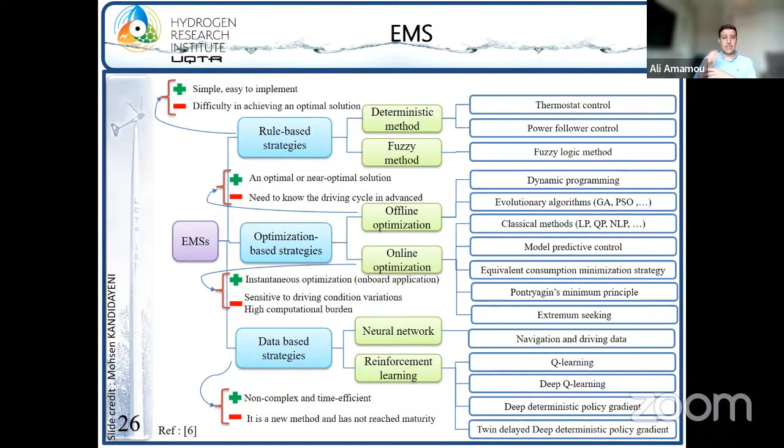Another aspect for mobile industrial robots is how we can optimize simultaneously the energy efficiency and the operational efficiency of the AMR fleet. Because what I presented in the previous slides is how to optimize and increase the energy management strategy, the energy efficiency of the hybrid system, just by an individual focus on one vehicle.

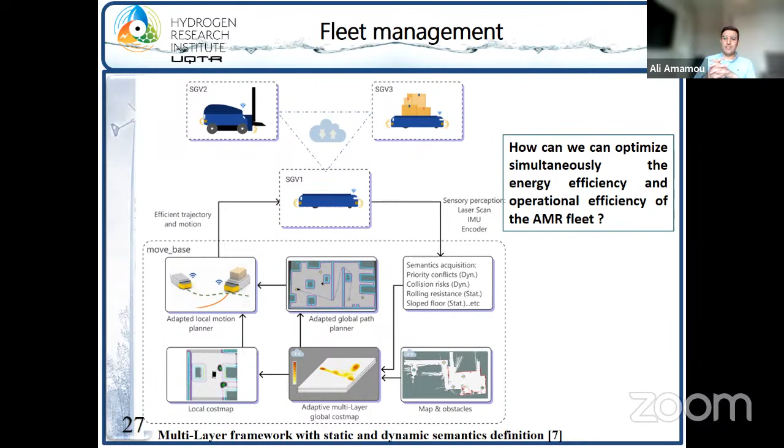Here, also in industry like warehouses, you will have a lot of vehicles. So we work a lot in the multi-layer framework with static and dynamic semantic definition. And the idea is how to improve the routing of every vehicle to increase the energy efficiency of the global fleet. So we consider a lot of decentralized architecture.

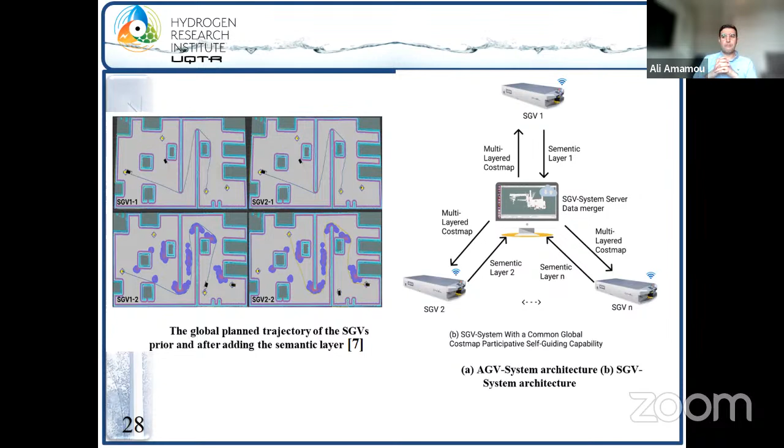So all the robots communicate together in real time, like Google Maps. We try to update in real time our map with the conflict zones or zones with a lot of traffic, to give our robots the opportunity to choose the best routing in terms of energy efficiency.

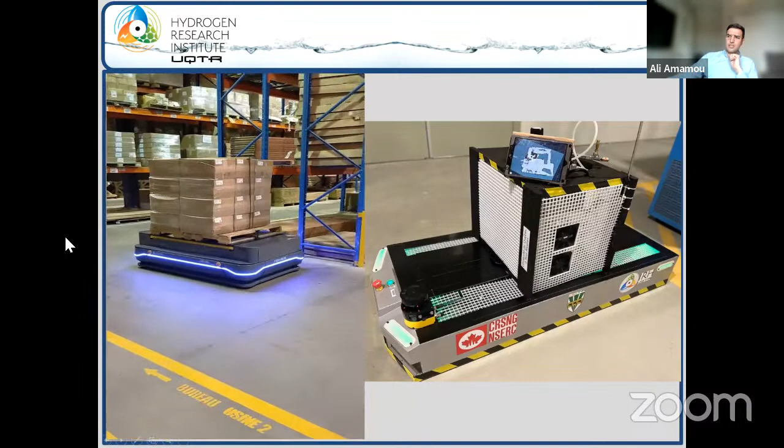So here on the left, this is our mobile robot, autonomous and intelligent, and it's powered with hydrogen as I explained in the previous slide. It was battery-based before, around 8 hours of operation, and with hydrogen we reached 24 hours without any refilling.

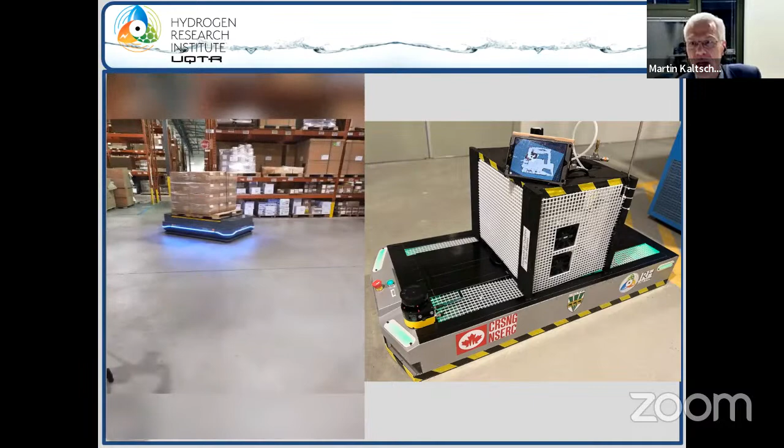Ali, excuse me, can you go a little bit closer to the mic? The voice is very hard to understand.

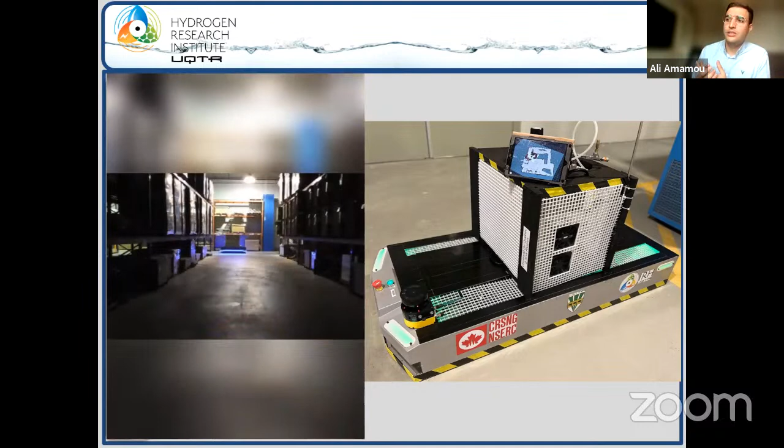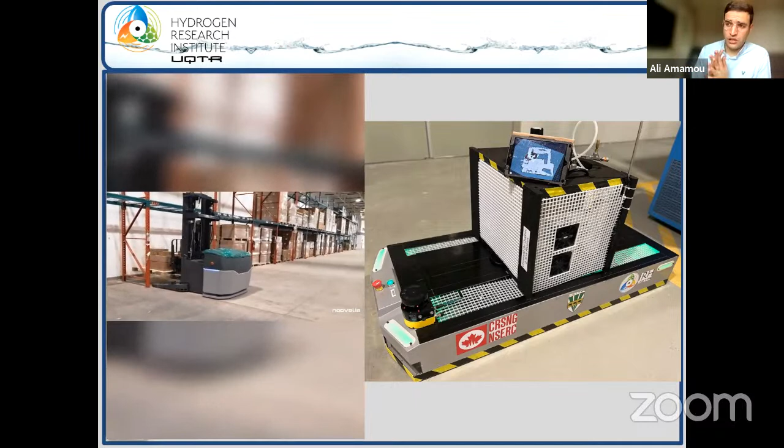So as I explained, we are now more interested to include that hydrogen tank in our forklifts. Our forklifts are now autonomous, so we integrate all the autonomous navigation stack on them, and soon we'll try to also include our hydrogen tank to be powered with hydrogen to expand its operational efficiency.

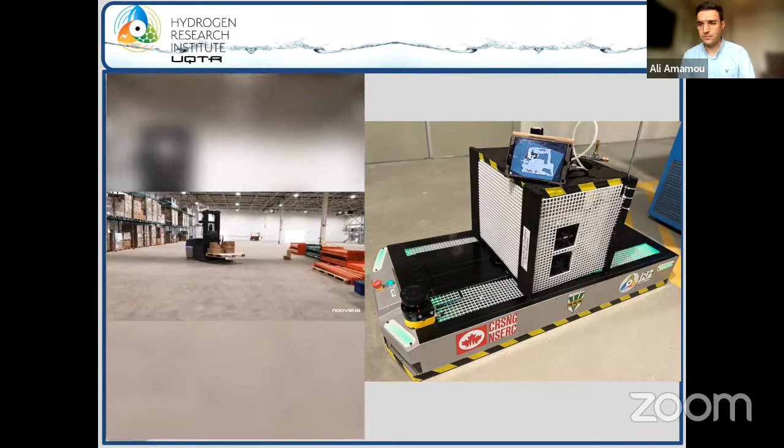Ali, thank you very much for this very interesting presentation about the ongoing activities. Sorry that I interrupt you, but the voice had partly disappeared, so it was difficult to listen to you and a little bit hard to understand. Please apologize.

Thank you very much to both of you for these very interesting presentations. We have learned quite a lot about ongoing research and development. In parallel, I think we're seeing at the moment that the market should uptake these developments. Therefore I would like to see your view, maybe from the German point of view and from the Canadian point of view, on how you see the competition between hydrogen vehicles and electric driven vehicles.

I understood that you do a lot of work in this area, but at the end of the day, if you look at it from an energy efficiency point of view, electric driven vehicles are much more efficient. At least with my viewpoint and with my glasses, we see that at the moment electric driven vehicles are a little bit ahead of hydrogen vehicles. And if we build up an infrastructure for electric driven vehicles, we would most likely not build up in parallel another infrastructure for hydrogen-driven vehicles, at least not in the metropolitan regions and in the more densely populated areas.